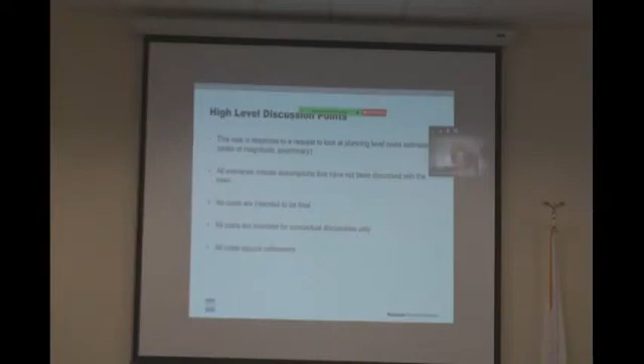I just want everybody to understand these are big picture issues we're going to talk about. I am going to present costs, but I'd ask that you don't make decisions based on the costs I'm presenting today, okay? They're done in a vacuum - we usually don't do things in a vacuum, but this was done that way for the purposes of spurring discussion and providing some basic information.

So first, reclaimed water analysis. Reclaimed water has to be treated to a higher level. Reclaimed water is water that might end up in contact with people. So if you have it on a golf course watering or something like that, you have to treat it to a higher level than what's required to discharge to, for example, the ground.

Mark, can I interrupt just for those viewing on TV? We asked GHD to look into this because there's a strong possibility that we may treat to a Class A standard some portion of the wastewater we collect and send it to Willow Bend Golf Course for spray irrigation on fields, thus the need for Class A water.

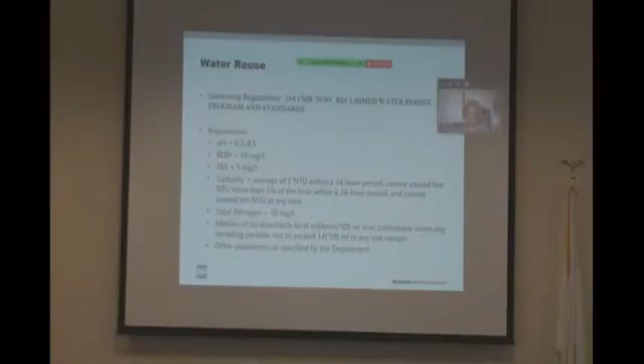So what I have here, I'm happy to go into detail, I might skip through some of these things and deal with this in a big picture, but please interrupt me if you'd like more information. The very top of this slide gives the reference in Mass General Law that defines the water reuse standards, and the bottom portion shows the different treatment requirements. If you allow me to flip to the next slide, I can speak to them in groups.

So at the very top there, the pH of the wastewater - these are all measurements of the quality of the water. The pH at the top is something that can be addressed by the existing water resource recovery facility. You can meet those standards with what you're going to have at the site.

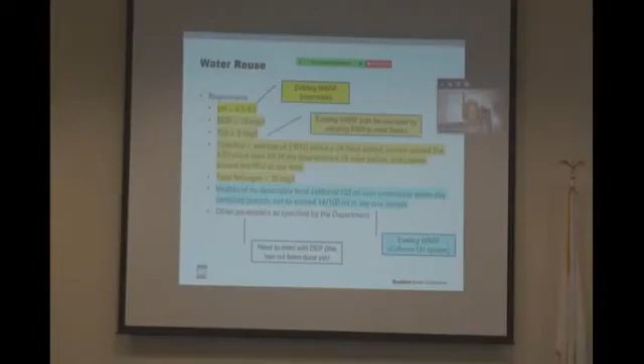The next four categories there - BOD, TSS, turbidity, and total nitrogen - those are all contaminant levels that can be addressed with a membrane bioreactor, which is the treatment process that's part of the upgrade. The only qualification I'd make is that we're currently not demanding the manufacturer meet these requirements, but they've indicated they can achieve this. The difference is it's possible to achieve that with that technology, so if in the future you wanted to meet it with an upgrade, you would be able to with a membrane bioreactor, same technology.

The next item is disinfection, and it's a contaminant level addressed by a treatment process called disinfection. This is the biggest issue with water reuse at the water resource recovery facility - a significantly greater treatment level than you are currently tasked with achieving. So this would be the biggest difference, the disinfection level.

What do you expect from us when we initially build the plant? What do you have for coliform counts? So, 200 per 100 milliliters. And you have to get down to almost non-detect.

Now, you mentioned a different UV system. So it's not necessarily - that's not quite correct. It's actually the same, like, kind of same manufacturer, but it's just more of it. I have some layouts I can show you, so I could show you the difference. It's the same type of system, but it's just a bigger system.

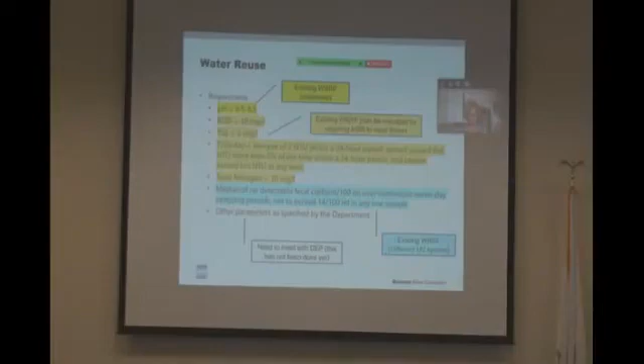The UV system is designed with bulbs - kind of like fluorescent bulbs, if you want a picture in your mind. It's designed so that the water column passing by it is a certain distance that it's effective at, so you have enough UV bulbs that you're impacting the column of water passing by it. So this should work, I mean, this would work.

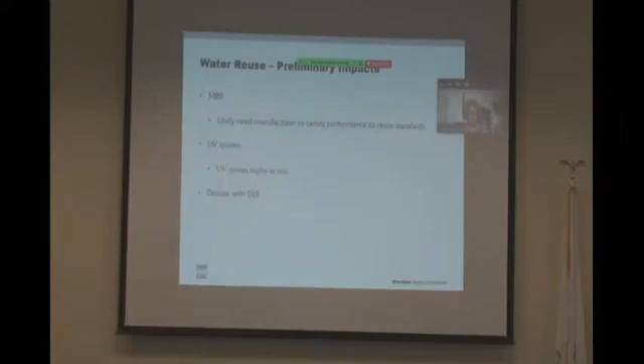So just as a summary, the impacts to the treatment facility are the MBR, the membrane bioreactor, would need the manufacturer to certify that they could meet those parameters that are in Mass General Law. The UV system would actually triple in size, so that's the impact. And then we'd have to review it with DEP. So these are some big picture things.

You have a question, Mike? No. Okay, keep going.

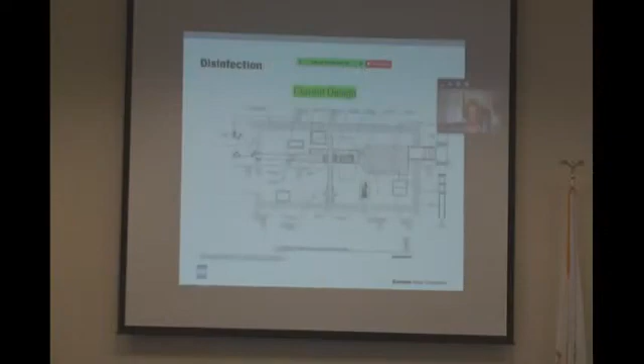Okay, so I'm going to walk you through what kind of impact this would have. What I did to try and illustrate this is use as an example what you are going to have there, and I'll talk about it in terms of flow.

So this is the ultraviolet disinfection room in one of the buildings that is part of the treatment facility. It's just a single room in the larger building that's primarily focused on the membrane bioreactor. What happens in here is the water passes through a pipe, and then it ends up in an open channel, and then these two - sorry, shoot.

How do I go back? Just go down. Previous, sorry.

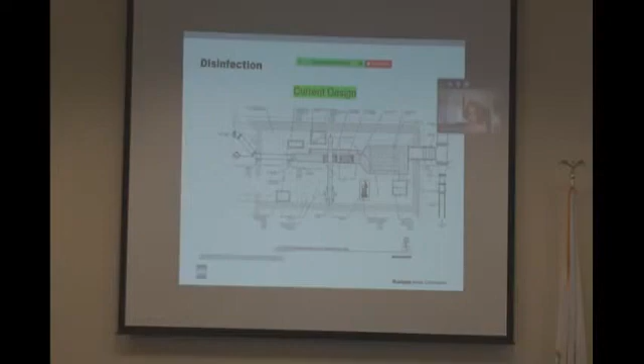These two gray boxes are ultraviolet disinfection modules that contain approximately 40 bulbs each, so a total of about 80 bulbs. That's designed to handle stage 1 and probably into stage 2, maybe a bit more. To go to stage 3 and 4, you'd need one more module there.

So this is what would happen in order to treat the same amount of flow, stage 4 flow, but to water reuse standards. You'd end up having to put another channel in, and instead of 3 modules, you'd have a total of 8.

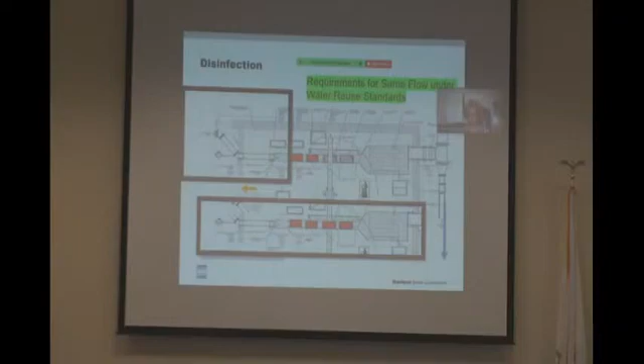Mark, if we were to decide after we had the plant up and running, and after we had started to gain flow, is there a point at which we're quite sure we're going to be able to discharge stages 1 through 4 at the existing site, if we start to bring in more water? Is there a way to separate the water we would send to Willow Bend, treated to Class A standards, from not having to treat and not having the expense of electricity for the first 0.48 million?

You can. There's many ways it can be done. I'm going to talk about one way, okay? So if I go backwards here.

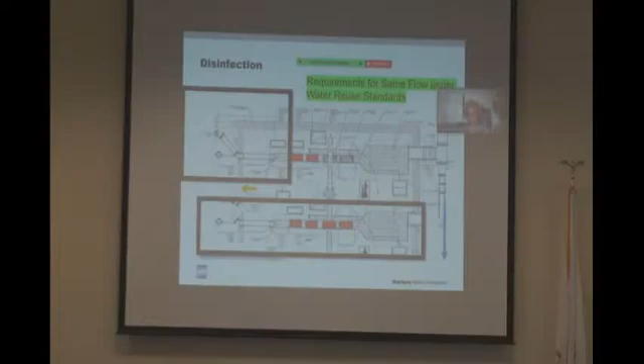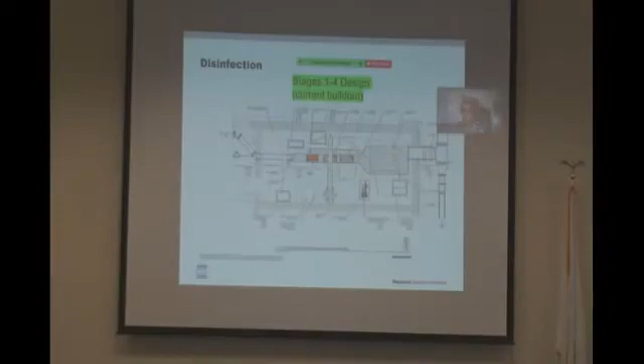This is the building that is currently designed. You have a room. If in the future you're going to double the flow that was originally planned for the site, go beyond stage 4 - let's call it stage 8 - if you go out that far, you can have a parallel connected facility that would treat to a higher level. So you could have half your flow going through here and another portion going through a parallel UV system.

There's other things to think about here, and who pays for it is another question too. How's it stored? How do you convey it there? So those are other issues too. But you can separate it.

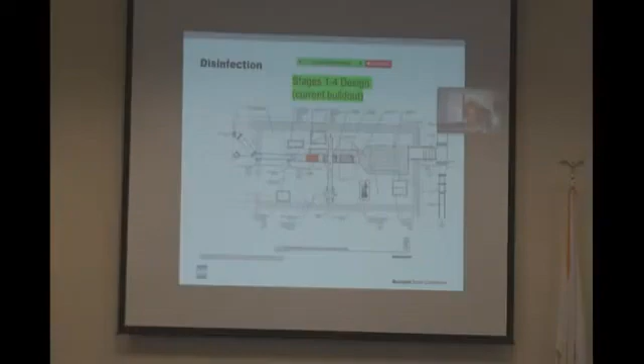The cost of treating it is also going to go up, so you probably want to separate it rather than triple your cost of treatment when you don't need to. Yeah. Right. Okay.

I will say this: if you have a portion of the facility devoted to achieving that high level, you can always turn it down and not use that extra energy when you don't need it. So if it was only a seasonal thing, you could do that. Okay.

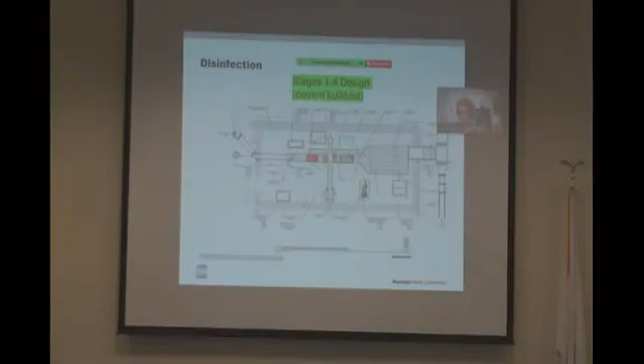There's a cost of having equipment sitting there and not being used, though. That, you'd have to keep in mind too. That's an investment. But if you need to do it to dispose of wastewater, then that's the cost of disposing of wastewater, right?

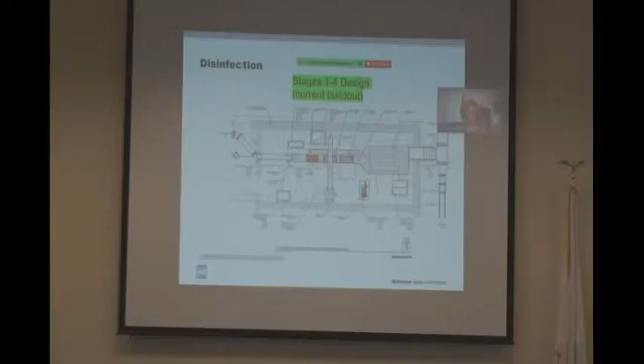So although I said triple the size, I'm going to tell you how I came at triple, even though it doesn't look like it. You have to have a redundant module in each channel. This is your last line of defense for disinfection, so the state requires that one of these units is purely redundant - it's not needed for treatment, it's there in case you need it. So the last one is a redundant unit.

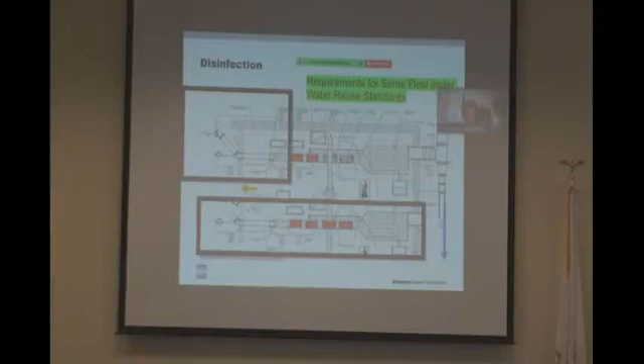So you're left with 6 modules when in reality you only need 2 to treat that flow for the 200 per 100 milliliter standard limit. Does that make sense?

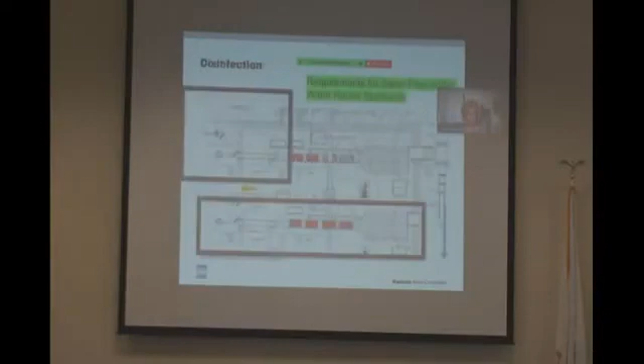So the UV system would need to triple in size, but the space requirements are really only about double or a little bit more than double. That's just based on the room size. I didn't really focus on that here, but there's some equipment you'd still be able to use - there's lifting devices that you can use for both. So you don't really need triple the space, but maybe a little bit more than double.

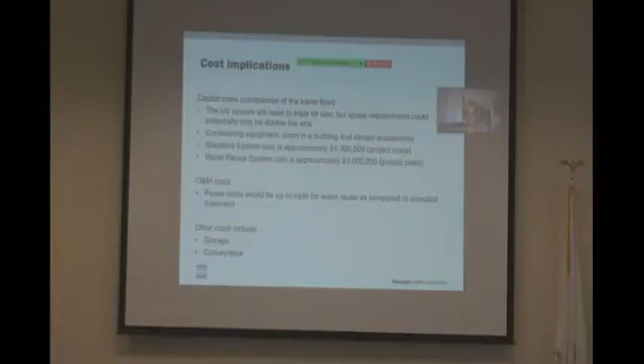This is just for the purpose of big picture costs. A standard system, that room and the accessories, you're looking at maybe 1.3 million versus 3 million for the water reuse piece, water reuse layout. So again, this is just the room and accessories, the UV system.

So it's a one-time capital cost? This is just the capital cost, correct? Yep. Your power costs presumably would triple for that unit, for the operation of that unit. But with what you're proposing to do, I think it's only during the summer months that you would do it, so it would triple when you need to use it. In the off-season, it wouldn't, so it would be some composite of that.

And is maintenance on this kind of technology pretty expensive?

The primary maintenance is the bulbs and their replacement. They're more sophisticated, but they're bulbs like the ones in here. They need to be replaced approximately once a year. The bulbs need to be cleaned because even though it's relatively clean wastewater, it still has particles in it, and they end up getting fouled as the wastewater passes by. They have to be cleaned. So the primary routine maintenance cost is the bulb replacement, probably once a year.

If we were to deliver water to Willow Bend, Class A water, was that something DEP might require? That's not in the regs right now. So we'd have to talk to them, but it's not in the regs. Okay.

So the category I think you're thinking about is total organic carbon. That is a contaminant category that the state monitors for discharges to zone 2, drinking water aquifers. And that is not something you're subject to at this point.

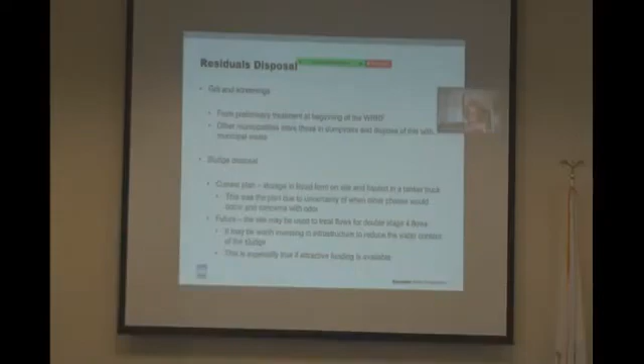So we'll talk about residual disposal. There's a couple of items here. Grit and screenings is one. Grit is things like sand and fine inert materials that are in the wastewater.

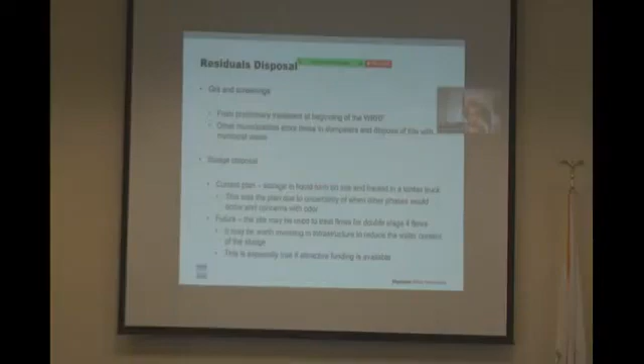Screenings are things like rags and wipes that people throw down the drain. These are all things we like to take out ahead of the downstream sensitive processes in a wastewater treatment facility. Screenings are taken out by something called a screen, it's kind of what you'd imagine. Wastewater passes through a screen, and the rags get trapped on it and removed.

The grit, which is like sand, is taken out through a grit removal system, which uses different types of mechanisms, but sometimes it's just the sheer weight of the material that settles it out, and it's then removed from the waste stream. Most facilities will take this material, bag it, and put it in with solid waste to be removed that way.

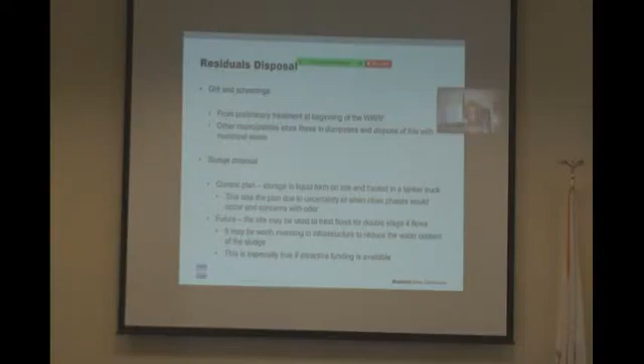I think a lot of the smaller facilities have been able to just manage it that way. Sludge disposal is a bigger issue. The current plan is that the sludge would be stored in a tank in liquid form and hauled off-site in a tanker truck.

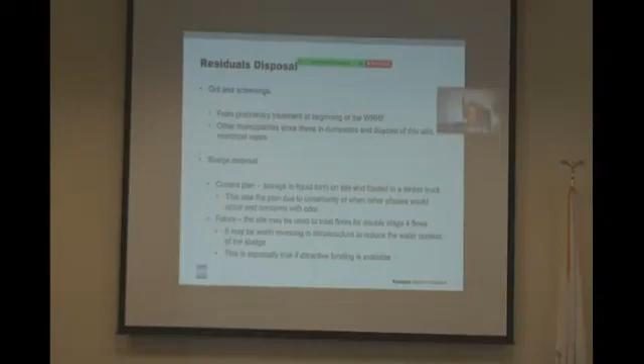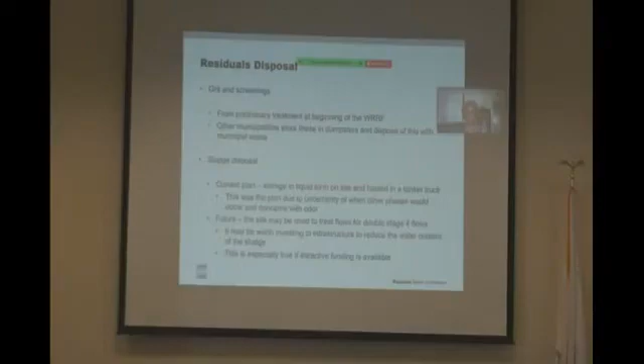The reason for that is because back when the design started, at the end of the planning process, there wasn't a good feeling that things might progress beyond stage 2. It's recognized that it's a shame to haul water, but you also don't want to spend a dollar to save ten cents. If you don't produce enough volume of sludge, there's a point where it's not worth it, where it's not cost effective. So it's a lot more simple to just haul it in liquid form. A lot of very small facilities handle it that way.

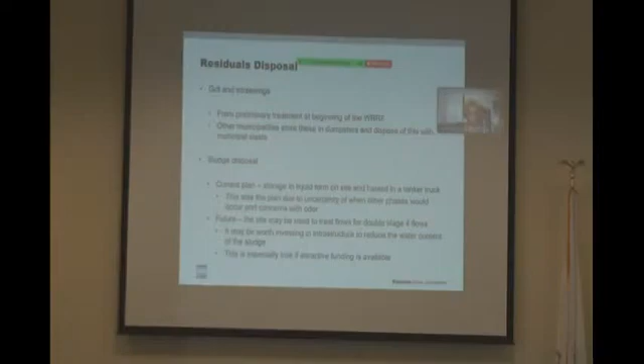At what point, based on what you know about what we're proposing, do you think we should be looking into our own sludge handling facility? What I'd say is, even though I'm going to give you some costs here, given your current plans, you should think about putting in a sludge treatment facility.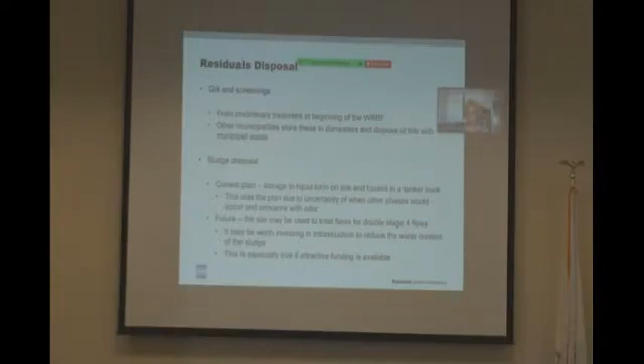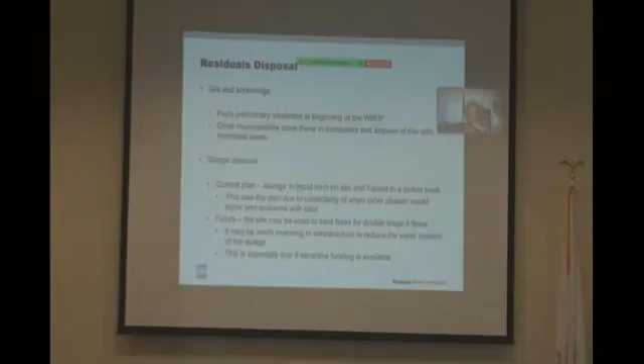Your size is jumping from a very, very small flow to something more typical, honestly, for the Cape, something like Provincetown, Chatham, Falmouth, all of which have a means of processing and thickening their sludge. You've jumped into that arena where it may or may not be technically cost effective, but there are other factors to bring in and think about.

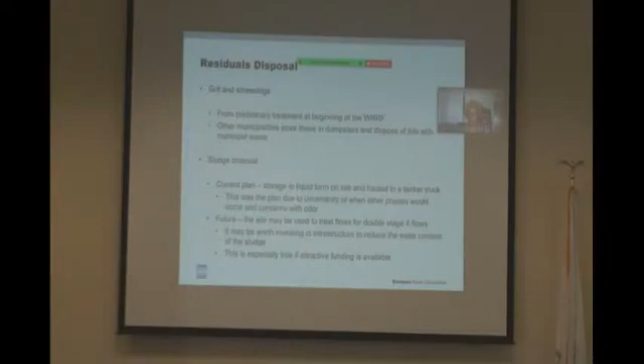I've worked at some facilities that had issues with their sludge thickening equipment and had to haul liquid form, but couldn't get enough trucks to come haul their liquid sludge because it was too much. If you just need one truck and tell the guy you need him sometime this week, you'll get him sometime this week. But if you call and say you have an emergency and need 10 trucks, that's going to be different. So you're heading into an arena where it's much better to start investing in sludge thickening or dewatering equipment. Can you talk to the group about the difference between thickening and dewatering?

So the liquid sludge, I'll start with that. The liquid sludge that you currently will have, there's sludge that's generated as part of the biological treatment process. That is almost exactly water. It has solids in it, but it looks just like water.

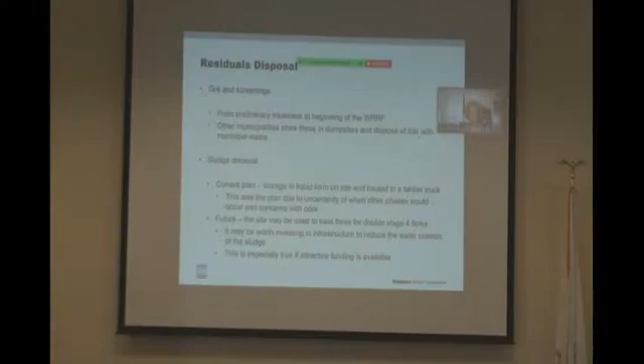A thickening process will approximately reduce the water volume, you'll have about 1/6 of the volume. So it's a pretty significant jump there. But it's still pumpable, you can still actually pump it, so it's still liquid.

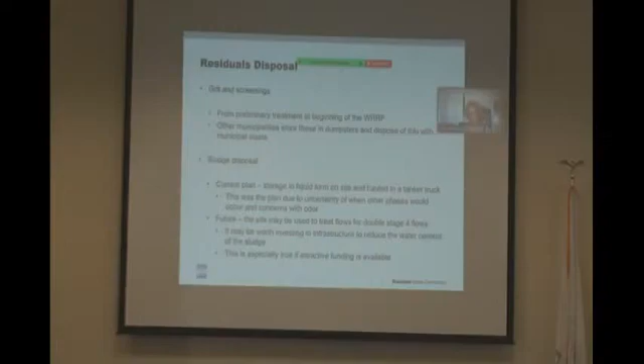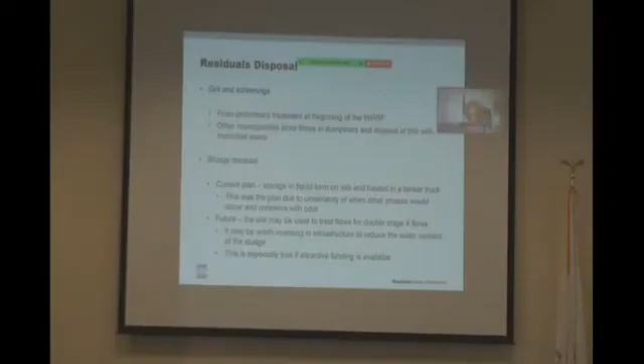The next step is what's called dewatering. They call it sludge cake because it has the consistency of like a birthday cake, so just to put something in your mind, it's like moist solids. And that's another factor, it might be 1/20th of the volume of a liquid sludge. So now you're really taking out a lot of water in that case. Even though it looks solid, there's still a decent amount of water that's still in it.

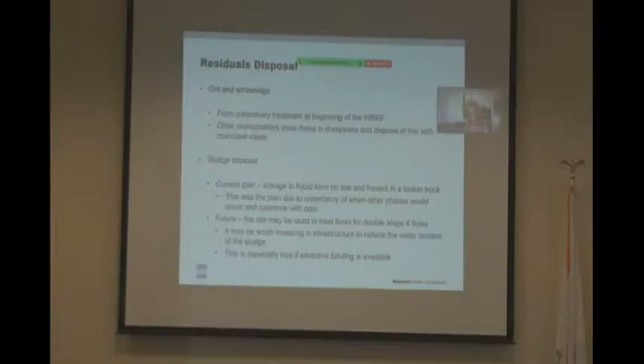So why would you choose thickening over dewatering? It partially depends on the availability of your sludge disposal. What are your sludge disposal options?

Chatham has sludge dewatering. Their sludge goes to Maine right now, they truck it all the way to Maine. Other facilities that thicken their sludge, right now they go to Cranston, Rhode Island.

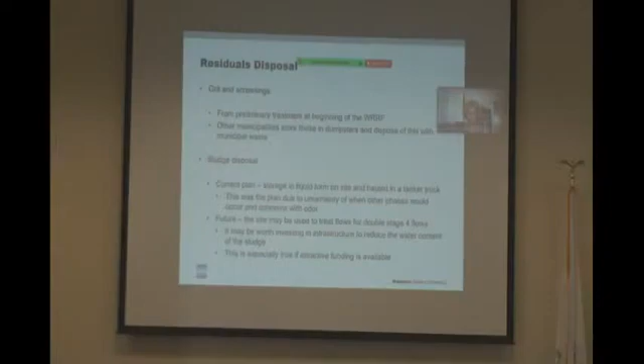Unfortunately the sludge market is privatized, so it's not something that the state or the federal government manage. It's wherever it's cost effective, whoever wants to take in sludge, they do it, and it might not be convenient for you. It might be convenient for Woonsocket, Rhode Island, because they're right near Cranston, right? But it may not be convenient for people on the Cape.

There is an entity that is exploring a sludge receiving facility in this general area, Yarmouth, I've heard Plymouth, I've heard Fall River. And sometimes you're limited by what they want to accept.

A lot of facilities like to accept thickened sludge because they can mix everything they get from everywhere, and then when they dewater it, they get a consistent product. You'll end up with something very inconsistent if you do something from Mashpee, and then you get a next load from Falmouth, and they try and mix it, and you can only mix it if it's able to be pumped.

Another big factor that's come about in the past 2 years is PFAS in sludge. It's a big problem right now in the sense that it's regulated differently in different states, in a very extreme sense in Maine, and that's where Chatham is sending their sludge right now.

There are some places that are afraid to accept dewatered sludge if they know there's PFAS in it. There's PFAS in all sludge, but if someone has tested it and determined that it's in there, they have to turn those results over, and some facilities will actually turn you down if you have tested it and found that you have PFAS in it. So that is a real big unknown in the market right now.

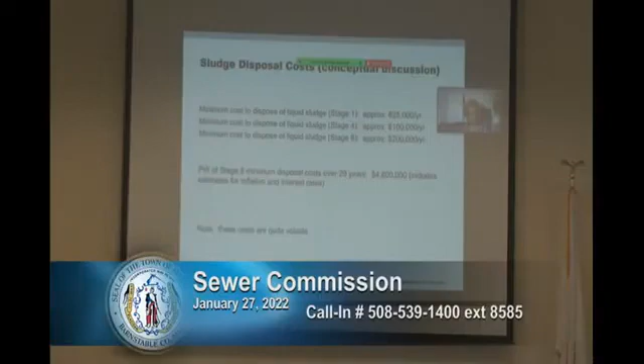So looking at costs that go out 20 years on an annual basis, you're looking at this $200,000 a year being worth about $5 million. So what's the cost of disposing of sludge over 20 years? It's roughly $5 million, let's say, okay? I'll bring this cost back so we could see it again.

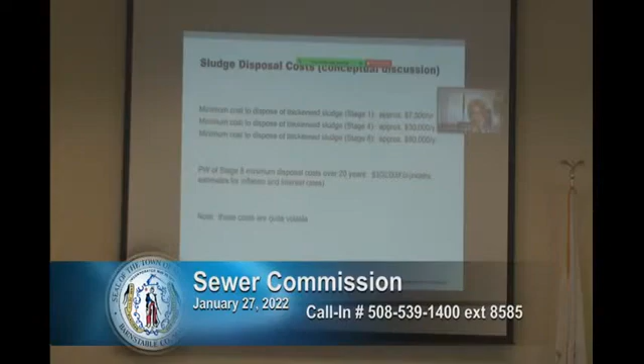But just as a comparison, if you look at thickening, that cost of $5 million drops down to $1.5 million because you're now shipping less water. So you will see quite a savings, okay? And then if you look at it dewatered, it's significantly less, okay?

But in order to do that, you have to invest in capital, right? What's your investment to get you savings? Well, I'm going to show some of that in a minute.

So first I'm going to talk about thickening sludge, all right? And I'm going to show a figure on a site plan too. So what's included in this? You need a thickening process, this is a piece of equipment. I'll show you an example of one. You need a building to house that, and it's going to house pumps and other types of electrical rooms, HVAC equipment. So you need a building. You still need...

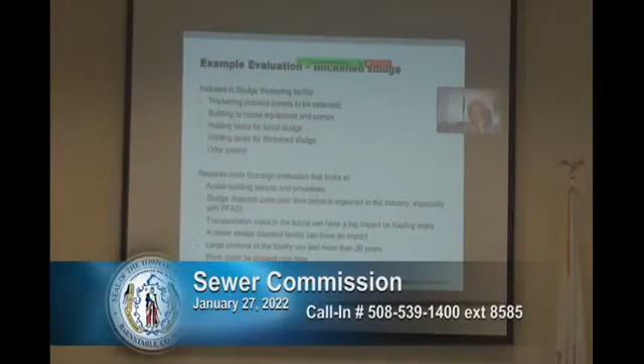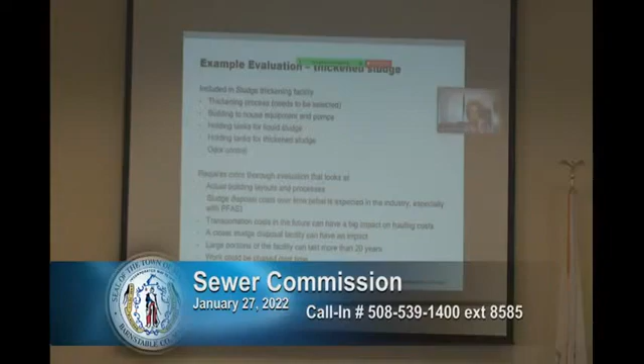You still need holding tanks for liquid sludge because you're going to be generating sludge. It's got to be stored because you're only going to thicken during daylight hours. So you have to have a place to store liquid sludge until you're ready to thicken it. Then you have to have a way of holding your thickened sludge because you're going to still have a tanker truck that's going to come to the site on occasion, and when that tanker truck comes, you're going to pump your sludge onto there. So you still have to hold the sludge in various forms until you can ship it off-site. Does everybody basically understand that? And then you're going to need odor control.

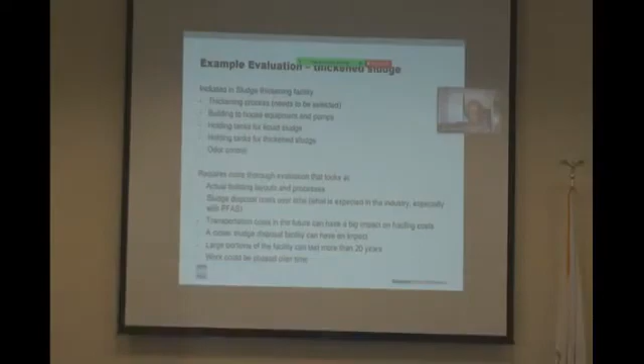Why do you only do it during daylight hours? So the equipment can be automated. Some of it can be automated, so you could do it during off hours. I will say normally for facilities of your size, it's normally done during normal work hours. A lot of operators like to be there in case there's a problem. It can be automated. Large facilities will process sludge over 24 hours, a lot of them might have personnel on site though.

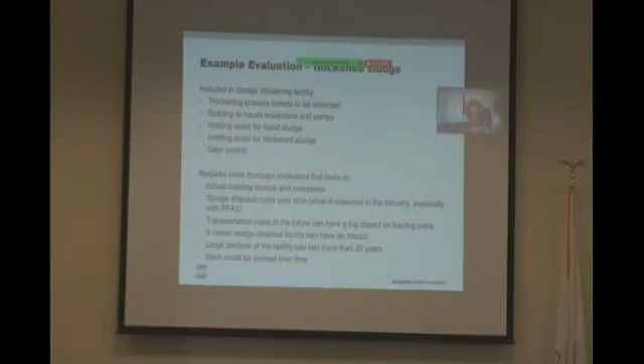So just please keep in mind, there's a lot of things here that I haven't talked to you about, actual building layouts. There's issues with the cost of what PFAS might have on the industry. Transportation costs, as you can imagine, can have a big impact. So if you're hauling liquid sludge and the price of gas is $4.50, that's going to cost a lot more. So there's a lot of things that have an impact on this.

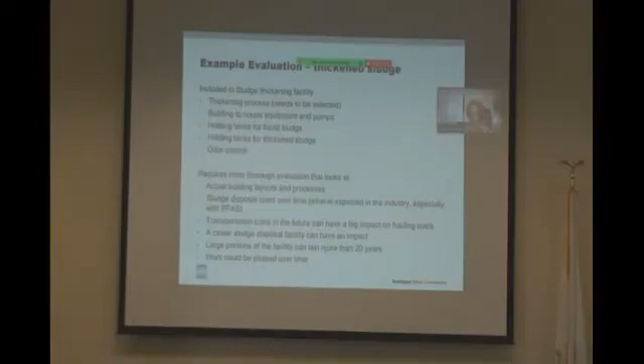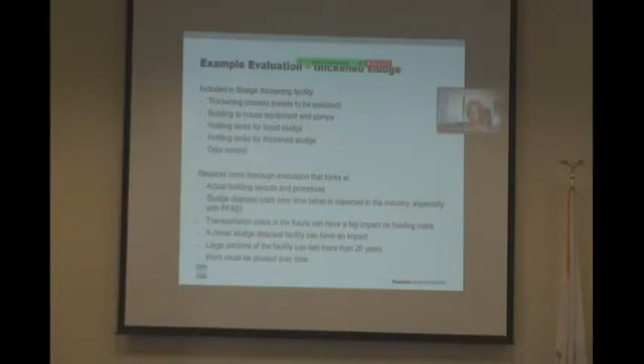The other thing to think about is that although when we put in municipal facilities, the life expectancy is generally seen to be 20 years, a lot of that infrastructure will last more than 20 years, okay? Equipment is generally seen to have a 20-year life, but buildings and tanks, that's going to last 50 years or more. So when you do your cost analysis, it's not quite fair to look at it only over a 20-year period. I did a 20-year period because that's the common period you look at, okay? So there's other factors to keep in mind with regard to that.

I'm also going to show you some things that can be phased. I haven't looked at phasing it, starting small and going, I didn't look at that, okay? That'll save some money and you won't see the full impact immediately. So I'm showing something here just to illustrate an example. This is Town of Falmouth, their sludge processing facility. This structure right here in the middle is where they do their sludge thickening.

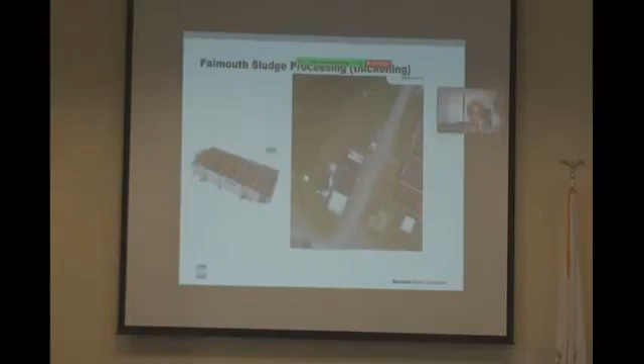This here and on this side is their liquid sludge holding tanks, and then in the back are their thickened sludge holding tanks. The liquid sludge comes into this tank, they hold it until they're ready to thicken, then it gets pumped into the sludge thickening process in this building. The thickened sludge is discharged in the back here to thickened sludge tanks, and then they have other pumps that will pump out to a waiting truck that sits out in the front. That's the process.

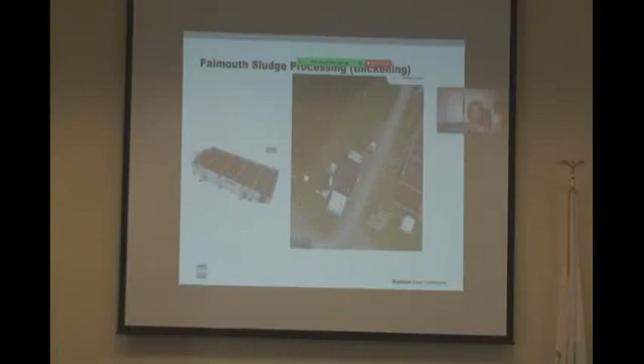Mark, how long does the process take for an amount of sludge to be processed? Typically what happens is in Falmouth, they'll allow their tanks to get reasonably full, and then they'll spend six out of 8 hours in a day to process the sludge, and then they might not have to do it for a couple of days while the tanks fill again, and then they'll process it again. In the winter, they might do it twice a month. In the summer, they might do it 3 times a week, so it just depends.

And just like the sizing of the facility, the sizing of this facility is going to be governed by your summertime wastewater flows, which is the peak for the facility. So that'll also need to be sized to match that.

Mark, is there a discharge from this operation? Good question. The water that is separated from the sludge gets returned back into the process for treatment.

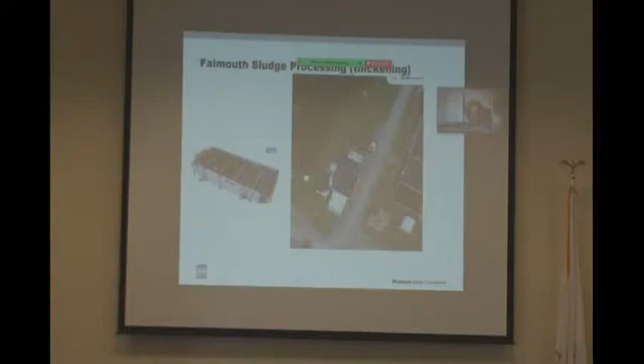This is actually one of, I'd say, 3, 4, 5 different types of mechanisms that are used for sludge thickening. What happens is the sludge is combined with a polymer. The polymer combines the sludge particles, which helps to separate the water from the sludge, and then the sludge is placed on what's called a gravity belt thickener. It's a belt with holes in it, and the sludge sits on here, and as it makes its way down, the water just kind of falls out underneath, and when it gets to the end, it's a thickened sludge. So it's a pretty simple process.

So you'd save $3 million. Can you build a thickening facility for $3 million? Maybe if you phase it. I was coming up with something between 5 and 10 for the full build out. If you phase it, probably.

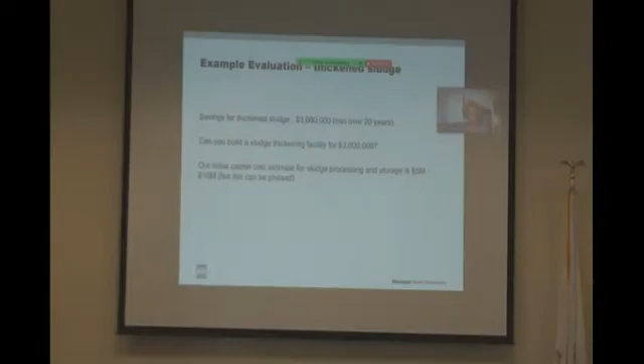I think it can be done, but I want to emphasize there are other reasons to put this in besides cost savings. There's a lot of money to be saved, and there's other reasons to do this, such as reduction in traffic from the hauling of these sludge trucks coming to the site. Also, like the example I gave earlier, there are times when you might not be able to get enough trucks, and if you can't haul enough sludge, it backs up your treatment process and affects the quality of your treatment. You don't want any impediment to getting rid of your sludge, because that will affect your treatment. So this tells me you're becoming the size where, if you phase this, it might well be cost effective, but you should be looking at it. You're going to be big enough.

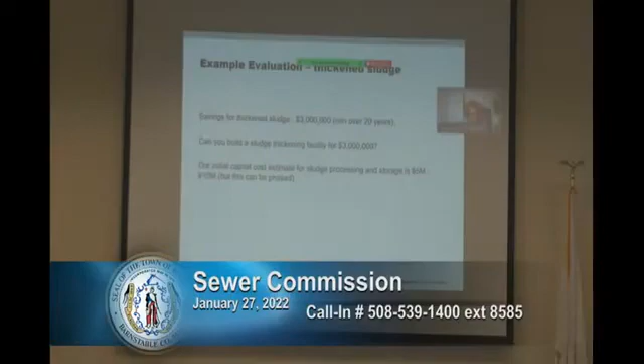All the other facilities of your size have that, and it's worth doing. Is there an odor here? Yes, of course there's odor that comes out - that's why I brought it up. So actually I have it on a later slide, but yes, there is odor. The odors are going to be present. Let me show this and I'll talk about the odors. They're everywhere, but contained.

Some thickening processes have equipment that is enclosed, and you can actually pull air off of the treatment process itself. Some operators don't like that because if it's enclosed, you can't see it, you can't see how it's operating. So it's a balance. But the odors don't get out to the street.

I went to Chatham and they didn't travel that far. Chatham has what I would call an open treatment process where inside the building, the odors go out into the building, so the entire building is treated, the air is treated. So you just end up with a bigger odor control system. You couldn't notice it unless you were close to the building, until you got right up next to it.

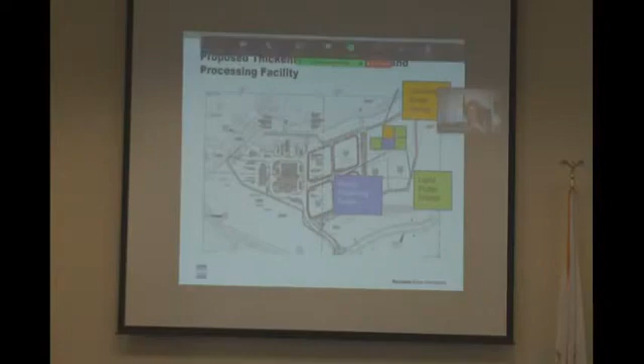So Mark, is this to scale? So we would effectively lose two sand beds based on the need for a building of that size? Yes, but wait till I get to the end and we'll revisit that. I felt like this was best to show first, but for some reason it wasn't - but I'll show. We'll follow you.

It is, yes, it is roughly to scale, to answer your question. Okay, so I'm going to talk about dewatered sludge.

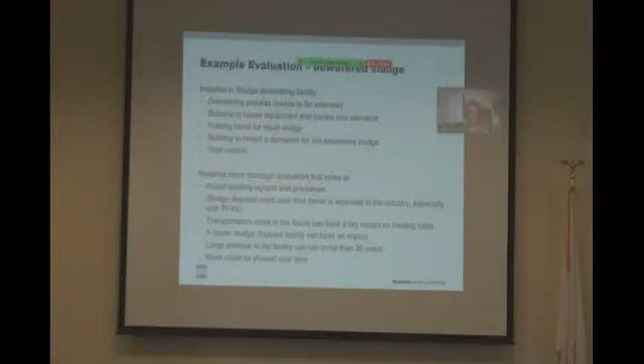That's another option. Dewatered sludge is similar in the sense that you'd need to pick a dewatering process. You'd still have a building that's going to house pumps. The one difference here is that because the end product of dewatering is unable to be pumped, you probably will need a conveyor instead of a pump, because you'll have to move it from the end of your dewatering process to a dumpster. That's typically done with a conveyor.

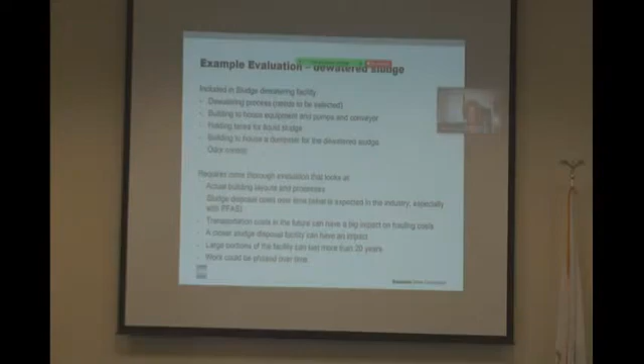Just like if you picture the conveyor at a grocery store, it's quite similar. Or you just put your dumpster under the end of the dewatering process - that's possible too, some facilities do that.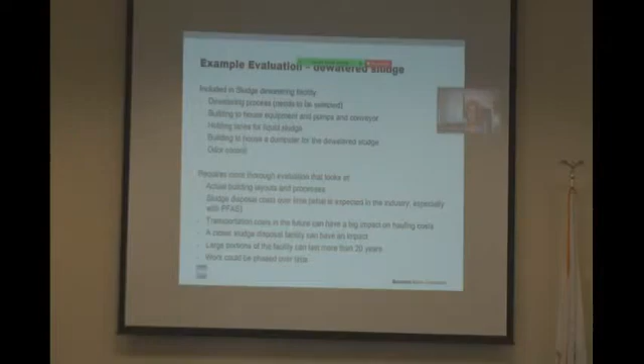You still need holding tanks for your liquid sludge. You may need either a larger building or a building to house the dumpster for the dewatered sludge, and then odor control. And then a lot of these other items at the bottom I just talked about - there's a lot of things we haven't talked about.

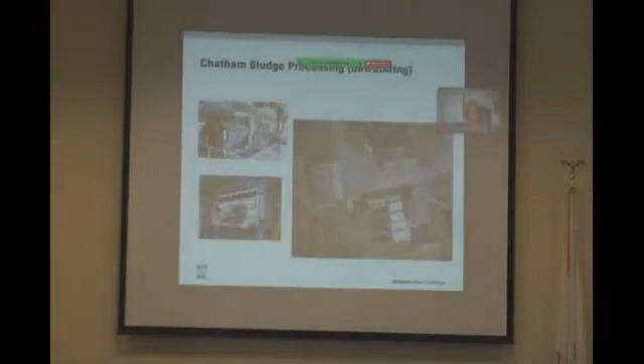But so Chris brought up Chatham - this is Chatham. There are four tanks here. Two of them are actively used for liquid sludge storage, and they are covered and have odor control. These two tanks are planned to be converted within the next year and a half or so to sludge holding tanks, and again, treated with odor control. This building houses their dewatering process.

And Chatham actually has an outdoor dumpster. They use a little tiny front end loader to pick up dewatered sludge, and then they move it over with the front end loader to put it in the dumpster. That was their preference - that's not common. I'm happy for them. Sorry, I think they had a Bobcat - yes, that's what it is.

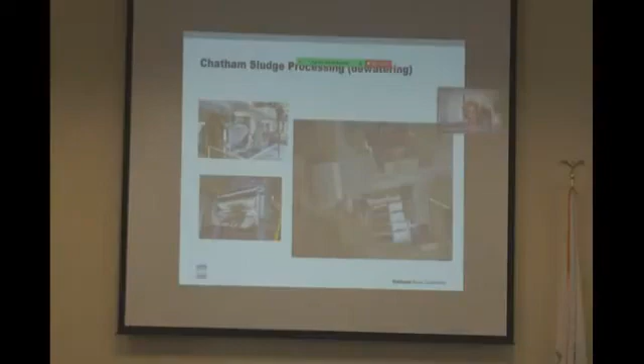Yes, and the process they use is a belt filter press. What a belt filter press does - I described the gravity belt thickener, which is a single belt that the sludge sits on. A belt filter press uses two belts, and it actually squeezes it, and sends it around all these rollers. It squeezes the water out.

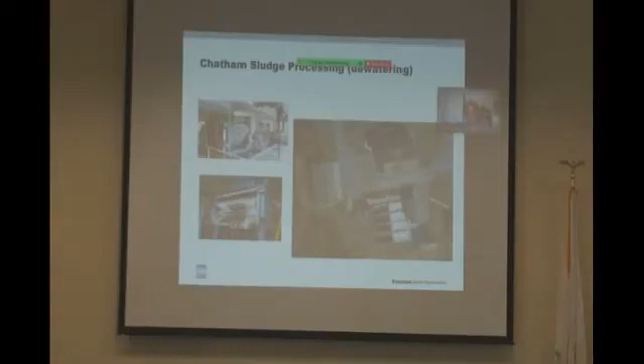But it wasn't bad - you didn't really have odor till you got right near the building, and it wasn't bad at all. So it's almost too bad you couldn't show people that, if you're proposing this - have the people who live around there go by and see how it is in actual practice.

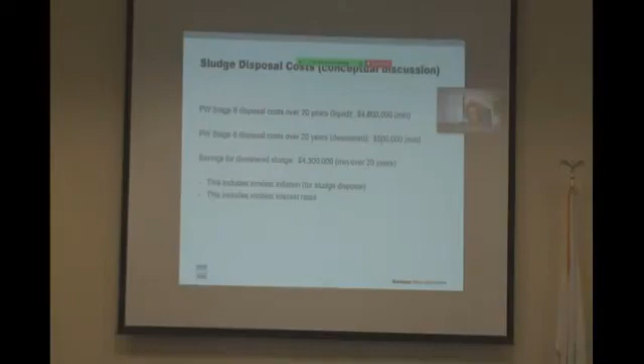So let's look at dewatered sludge costs. This is the roughly 5 million I showed before, 500,000 for dewatered sludge. So can you do a dewatered sludge facility for 4.3 million? If you're trying to purely make it cost effective, I'm thinking it could be in the 6 to 12 million range.

But that could be phased to make it less expensive, and there are ways to make this financially work even if it's not perfectly cost effective. There are overriding factors that would push you toward doing this, especially with having grant funding available. That can really push the equation in the other direction, and now's the time to think about that while that funding exists. You never know how long the funding will be around for.

So a dewatered sludge facility is pretty similar. You still have liquid sludge holding tanks, those are the green ones. You'd have a dewatering facility and perhaps a garage or something to store dewatered sludge in a dumpster, which gets hauled by a flatbed truck. They would pull the dumpster onto the flatbed truck.

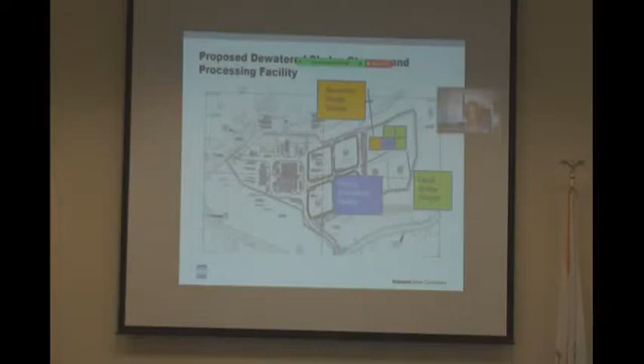That's what they do in Chatham, for example. On the Cape, that sludge ends up going to Yarmouth, where they accumulate sludge from different areas, and then send it up to Maine to a composting facility. They do reuse it, for now, not for plants that grow vegetables we would eat, but it's reused in the sense that you can add it to the ground for non-human consumption items.

All right, any general questions about thickening and dewatering?

I think we just have to realize the flexibility it would give the town of Mashpee, the options that the more you have, the easier it is to play the market and see what you can do for the cheapest amount. But I think they need to move something forward. If you leave with anything, my suggestion is this is something you need to look at, given the size you're going to be. Every other facility at the size you're talking about has something like this, whether dewatering or thickening. So Mark, in your experience, which one would you go with?

The thickening gives you the ability, sometimes in the past, to shop it around more. Right now the closest place Chatham has found to get rid of their sludge is in Maine, and that's concerning to me. If you'd asked me 2 years ago it would have been easier to answer, but this PFAS issue has really thrown a monkey wrench into the situation. There's a private facility planned in either Yarmouth, Plymouth, or Fall River, and I've seen some plans where they propose to deal with PFAS on their site, so it's not something you'd have to deal with. They're prepared to deal with it if they have to, but nobody knows yet.

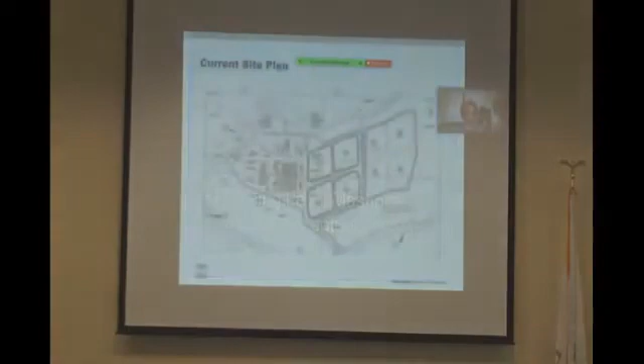All right, so this last topic is to walk you through some options on the site. This is the plan shown in the contract documents now, the water resource recovery facility. The middle part here are the sand beds, and then these are the future sand beds. Something Anastasia pointed out that's important to keep in mind is that although these sand beds are in the middle of the site, this is the approval we've gotten for the current discharge on the site.

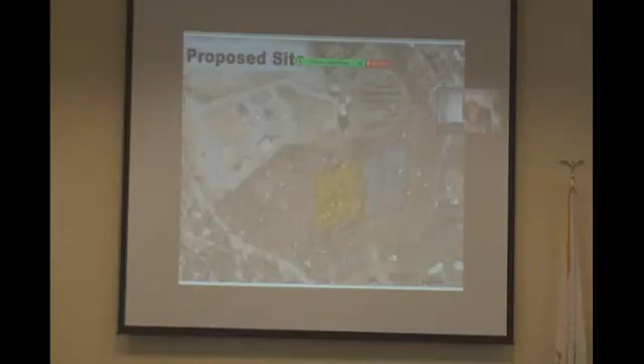We don't have an approval for this end of the site, our approval is for here, okay? So I'm going to walk you through an aerial photograph, and I have little figures that I've put together that we'll walk through to show how things fit on the site. Again, this is the water resource recovery facility and the sand beds.

So we have a figure here showing this is the property that you're considering, correct? Yes, the leased property. All right, so bear with me a second here.

Oh, shoot. What happened? All right.

It's easier on my computer. What are you trying to drag? I'm trying to rotate it, and it's not really doing it for me on here. It won't even move.

All right, that's okay, we get it, next slide. So what I was going to do was move it up here and show you that it fits in that spot, okay? That's what I figured you were doing. The thing you need to consider, Mark, when you're doing this, show us.

What are these, the 150-foot setback and 200 down here? You've got to throw your 150-foot setback on if you're going to put sludge behind people's backyards. Let me just show you the next slide, let me get into this.

I wasn't going to put sludge there. What I was going to do was put the sand beds there. Of all the things you can have, that's the nicest thing to have there.

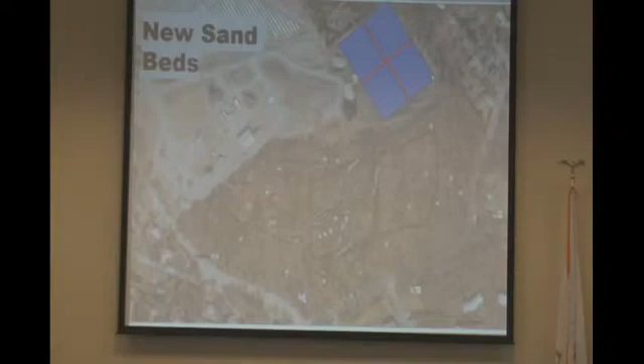If we get a higher infiltration rate, that might all go away, and possibly that too. But I guess what I want to show is, I think you'll see as we walk through this, and you might already see this from what I was showing before, that I think this is going to be needed. This spot would be useful for you to get a grasp of.

This is based on some discussions we've had about what can you fit on the site and where. This would allow a simple expansion, having all the liquid processes in one part of the property. You could have the sludge processes in the other part, odor control for the sludge processes, generator for the sludge processes, admin facility, odor control, generators for all these facilities. Again, this is one example.

These boxes can be moved around on the site. It's not as easy as it would have been two years ago when there was nothing designed, but still, I think you can see, at least from this illustration, that this is important -- we're going to need more property. I can't take all this stuff and put it over here, there's just not enough room.

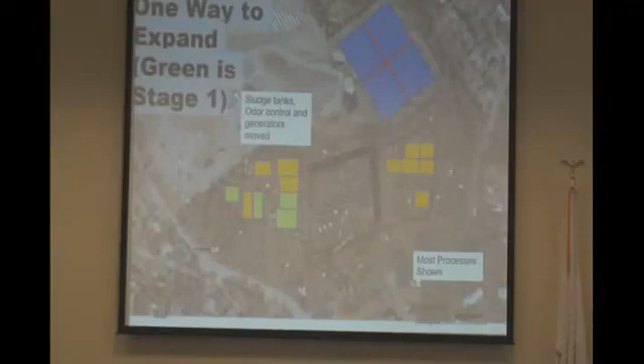I'm happy to go back to these. Oh, that's Anastasia. And what Chris said is right. What I showed here is what I'd consider kind of a build out for the sludge processing. You don't have to do it all at once, but you want to save space for it. This could perhaps be drawn more efficiently, getting odor control up here, and maybe save some space to continue with the sand beds there.

So I do think it's important for your future to latch onto that property. Anastasia is going to talk a little about the sand beds and flow rates next. But the bottom line is I think it's important to get that property.

Is that currently on the market? The town owns it, they lease it currently to a landscaper. Oh, but it ends in June. So, what are you thinking, Mark, in terms of our planning? When would we start to need that parcel?

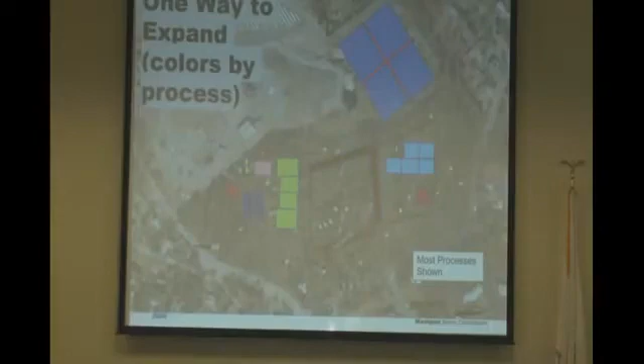If we want to lease it again, how long could the lease be? I'm going to let Anastasia talk now. It could go year to year.

This next slide outlines bed capacity depending on how many beds are built and what the hydraulic rate is. Currently, when we designed it, we're required to design for 7 gallons per day per square foot, which is very low compared to what infiltration tests have shown. It's sand, water goes down very quickly.

So those first 4 beds in the middle of the site are sized for stage 1. If we can successfully increase the flow rate from 7 to 30, which has been done in other communities on the Cape, we could get all the way to stage 4. So that's the original layout with just those 4 beds.

As we look at bigger flows, we'd need 8 beds, whether all 8 are laid out as originally planned, or whether, as Mark recommended, we break them up and use part of the leased property. Starting with our design flow, those 8 would get you to stage 2, double what we're constructing now. If you can get that 7 up to 12, you can get the original build out with the 8 beds. And if you bump it up to 25, you could get all of what you're calling phase 2 now with those 8 beds, whether they're on the current site or a combination of the leased and current site.

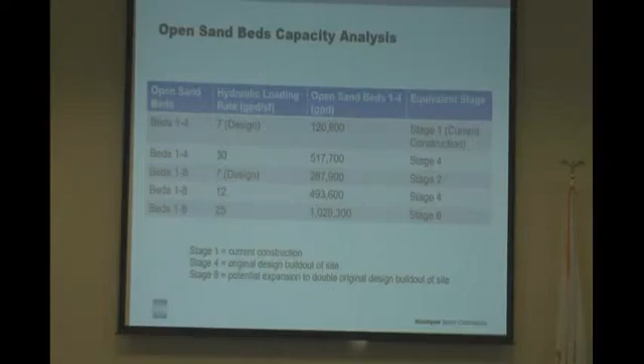So I would recommend as quickly as possible, so that design can proceed with certainty of knowing where they're going. You'd also need to do hydraulic load tests. Likely it's very similar soil, but you'd have to go through a similar process to what we went through with these beds here. Okay, thank you. So, as soon as possible. Yep.

So, Anastasia, in order to get 1 million gallons in the ground, we need to establish a rate of 25 gallons per day per square foot, and we would need all 8 beds. But if you can do both of those, you can have all your flow on one site.

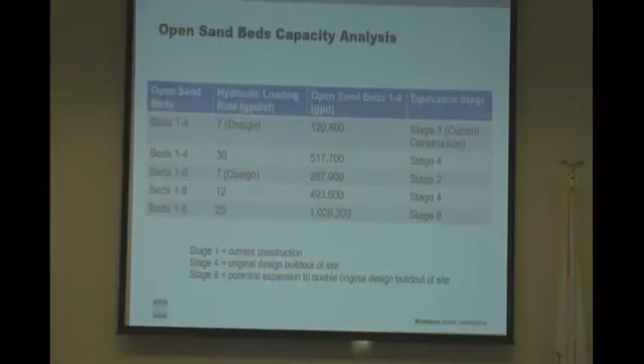The one thing I would add is that the 30 gallons per day per square foot, or actually anything above 7, thus far the state has only allowed with in situ testing of wastewater. So when we did our testing, it was with clean water, and the water from this plant is quite clean, but the state has only allowed anything above 7 to be done with actual wastewater.

So we've done testing in Falmouth with actual wastewater and demonstrated, since we could only get a certain amount of flow, that we can do 12 gallons per day per square foot. We capped out because we did it in 2020 during COVID when there wasn't as much flow as usual, so it's likely those beds can take a lot more.

The approval we've gotten previously for 30 gallons per day per square foot in Chatham was done with the caveat that we'd need to demonstrate it with wastewater, but they did say they would entertain that. So it's one of the few times it's actually been put in writing by the state.

Was it similar permeability for Chatham to here? Yeah, should be, same sand plain, pretty much. And this will be a cleaner effluent with an MBR process—it will be a little bit cleaner, which means it goes faster into the ground.

So for the committee, to address this, we asked GHD to do a proposal for running another hydraulic test with wastewater, possibly from Mashpee Commons, which is the same process, so it's an apples to apples comparison—borrow the wastewater, hopefully they're looking to give it away. Theoretically, if these folks run it in the same place and we get the same results, we should be able to get up to 30 gallons per day per square foot.